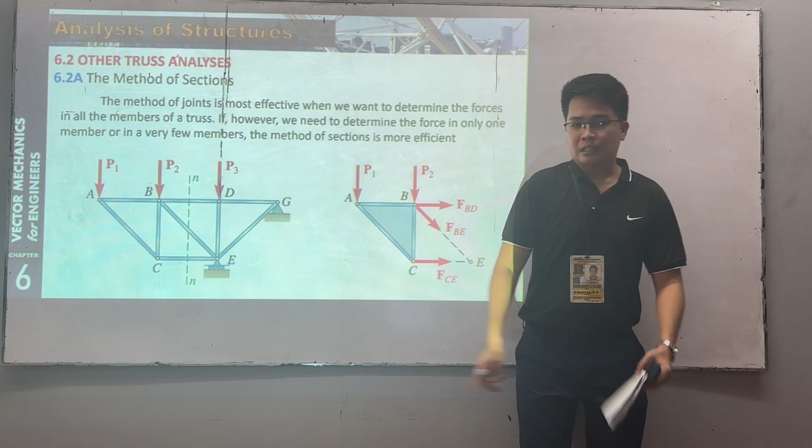Now, for the method of sections, what do we have here? The method of joints is most effective when we want to determine the forces in all the members of a truss. If, however, we need to determine the force in only one member or in a very few members, the method of sections is more efficient.

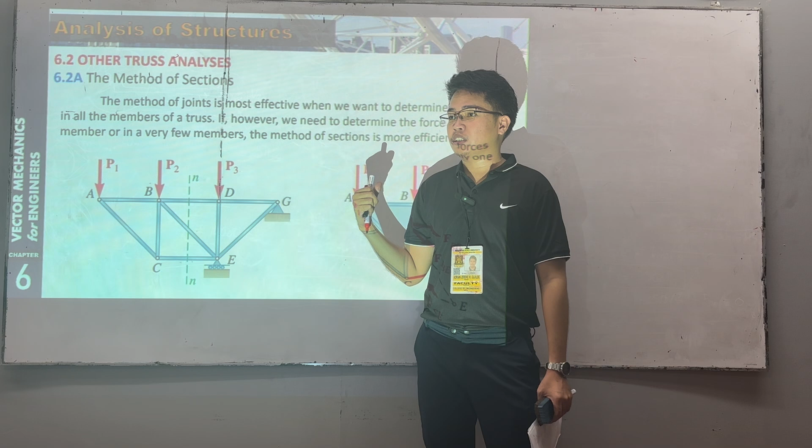So if you want to find all the internal forces, use method of joints. But if you only want a specific member, it's better to use method of sections.

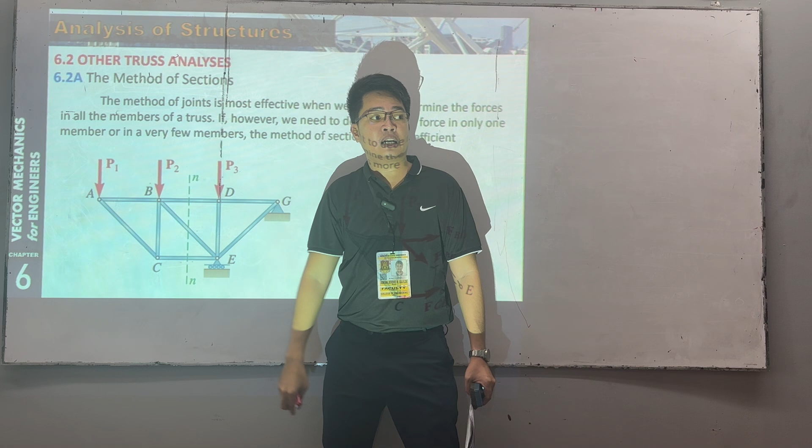In method of sections, if you're looking for a specific member, what you do is cut through it. When you cut, internal forces appear. So instead of having members, what we represent are these forces from the cut. And in using method of sections, our assumption for the force is always tension.

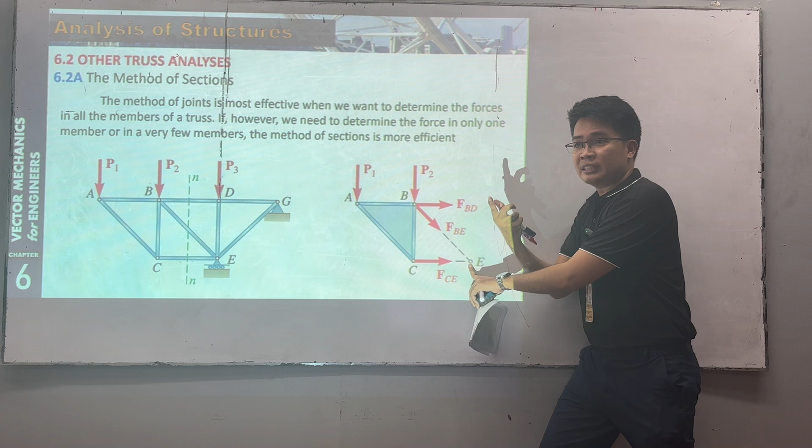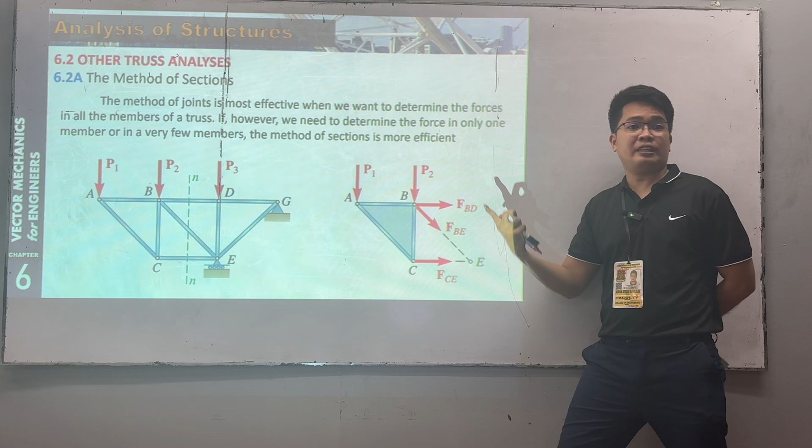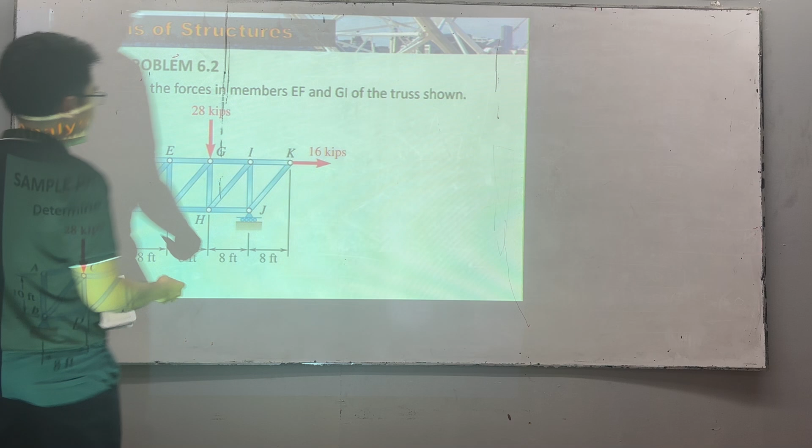So here: we have determined the forces in members EF and GI of the truss shown. So what are we looking for here? We have EF, this member here, and GI. So how do we apply method of sections here?

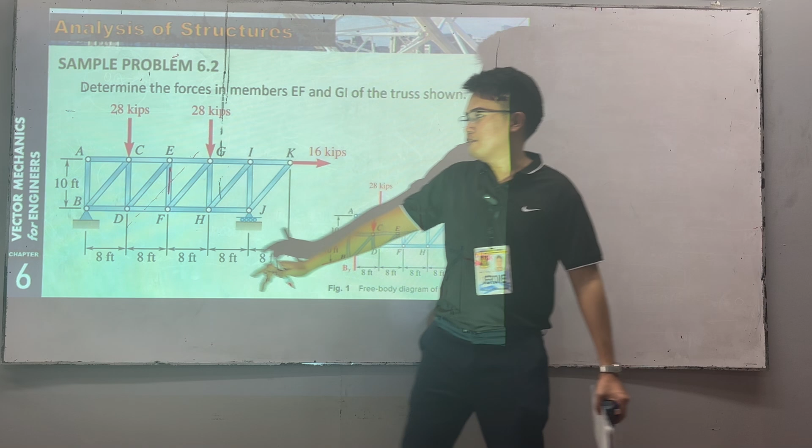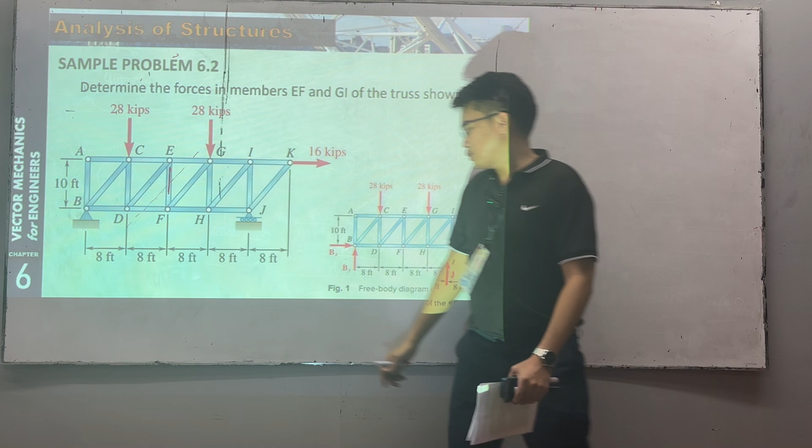So let's find EF. What do we do in method of sections? We cut it, so the image would look something like this. When we cut here, what comes out? It should always be in tension - so this is tension, this is tension, and this is tension. So we have FEG, FEF, and FDF.

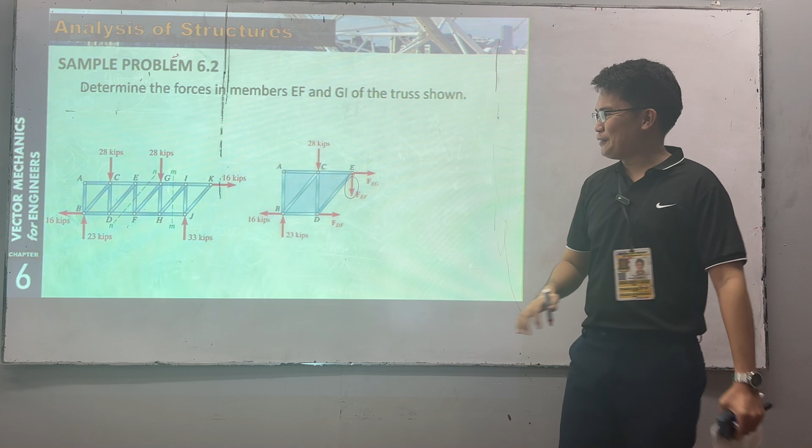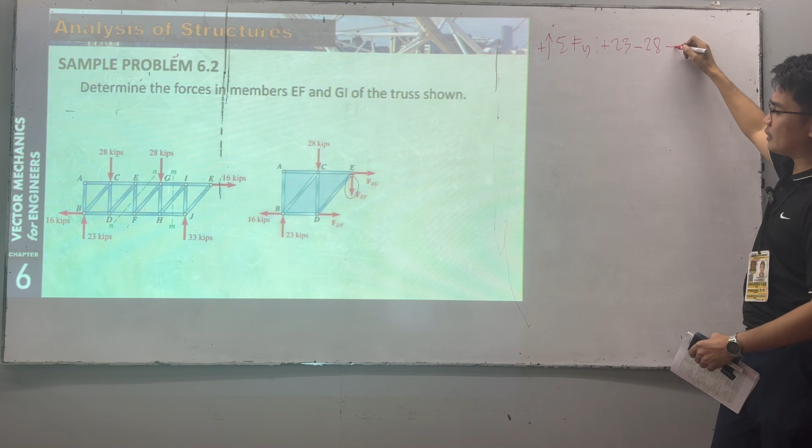Very simple - summation of forces along Y, positive upward. So what do we have there? We have positive 23, negative 28, negative FEF. So automatically, we can get FEF. What's its value?

FEF is negative - positive, negative. Negative, because 23 minus 28. So negative 5. This means our assumption should actually be compression, not tension - or rather, upward, whichever applies. Okay.

So what equation can we use that won't involve FHI and FHJ? Summation of moment at point H. So automatically, no moment, no moment - just FGI. So for FGI, summation of moment at point H, counterclockwise positive.

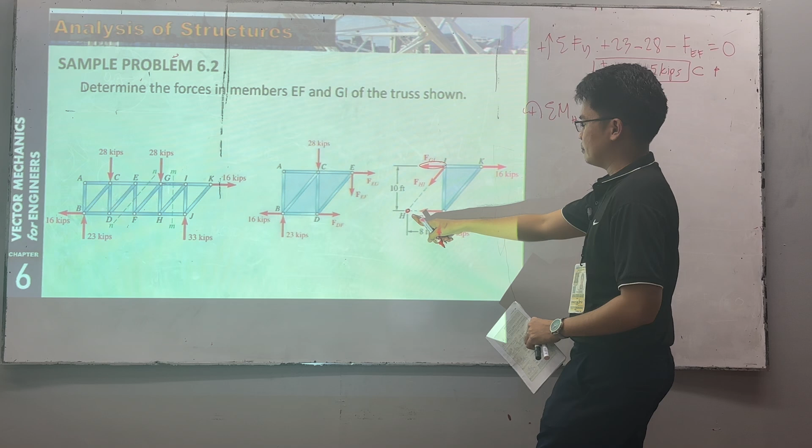So what do we have? FGI, which is positive, with moment arm of 10. What else do we have? This one - we have 33 positive, moment arm of 8. And lastly, this one here is 16 negative, moment arm 10, equals 0. So FGI here equals... what is it? It's negative - negative 10.4 kips.

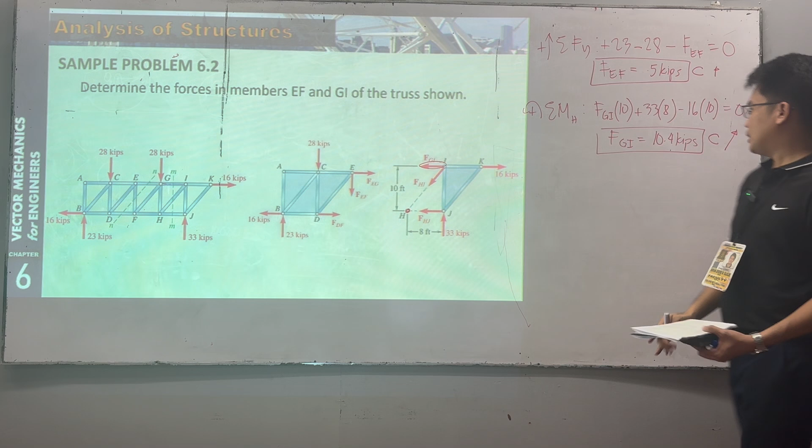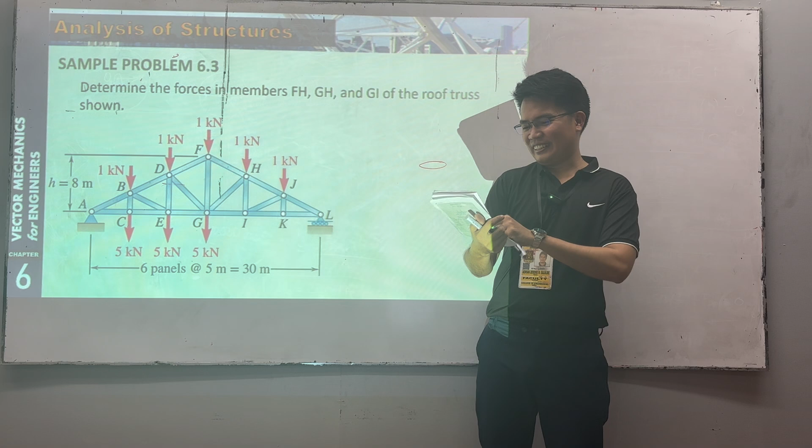Pwede na. Ang chapter 7 na ba? Kaya lisod na chapter do.

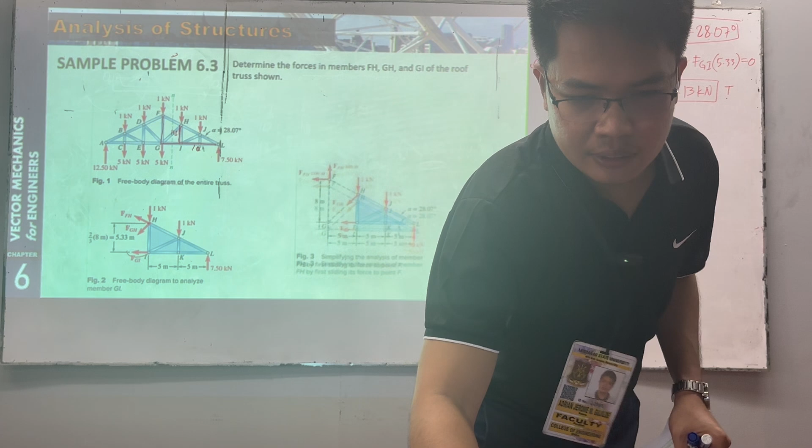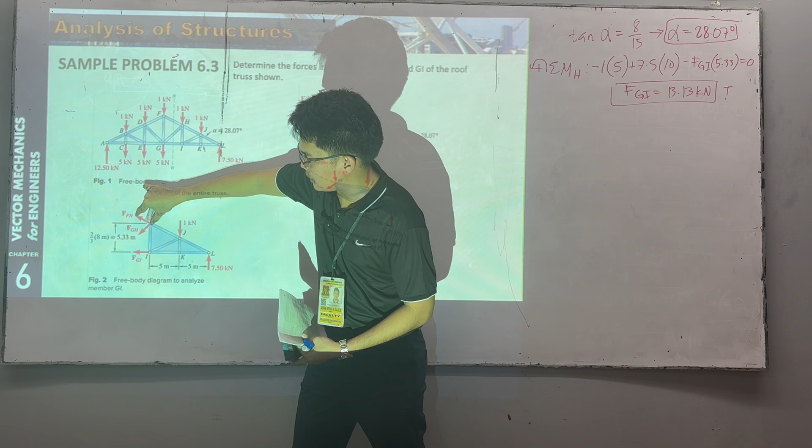Now, kung titingnan nyo dito, yung FFH natin is nandito. Saan tayo pwede mag-moment in order na ma-eliminate si FGI at saka si FGH? Yung gusto nating hanapin is ito. Sige, summation of moment at point what? Point G, kasi ito siya walang moment, ito siya walang moment. So, summation of moments at point G.

Anong nangyari dito? By principle of transmissibility, pwede ko yan usog as long as nasa line of action. Kung nausog ko yan, nandyan na si FH. And then, i-component ko. Kung mag-component ako dyan, ito na yung result: FFH cosine alpha and FFH sine alpha.

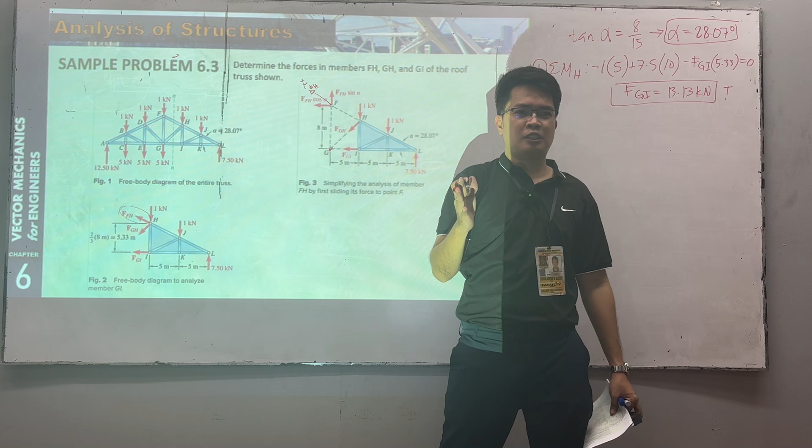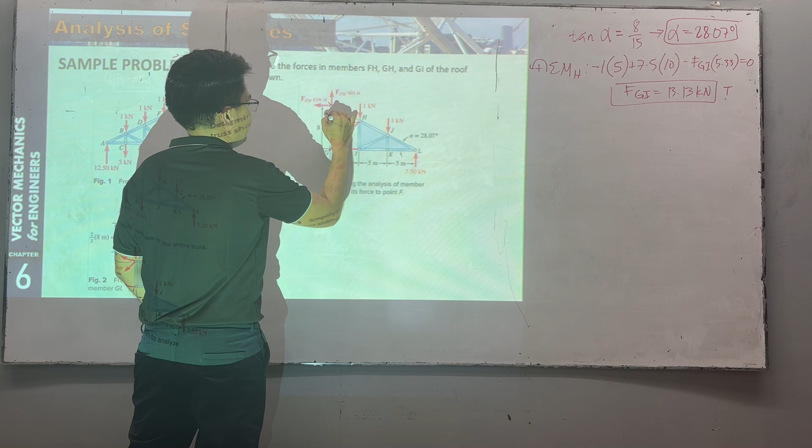Kung ayaw mong gumamit ng principle of transmissibility, pwede naman. Dito ka, so ano yan? We have papunta doon, this is our papunta doon, we have FH cosine alpha. And may papunta doon na FFH sine alpha. We have sine alpha. Pwede din to, pwede dito ka or pwede dito ka. Klaro? So, walang mababago yan.

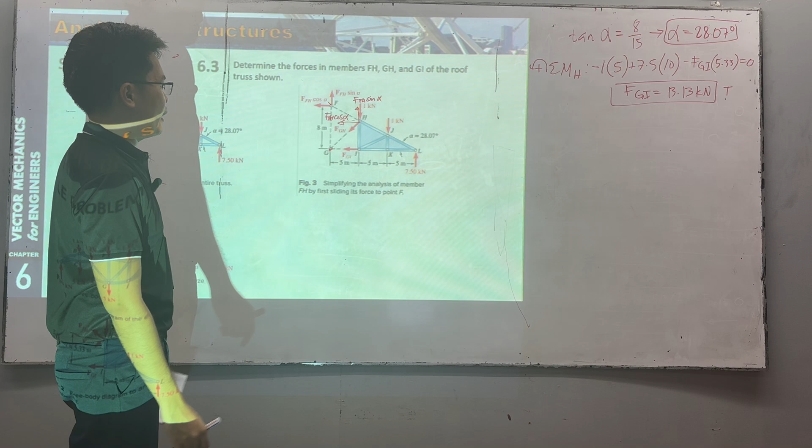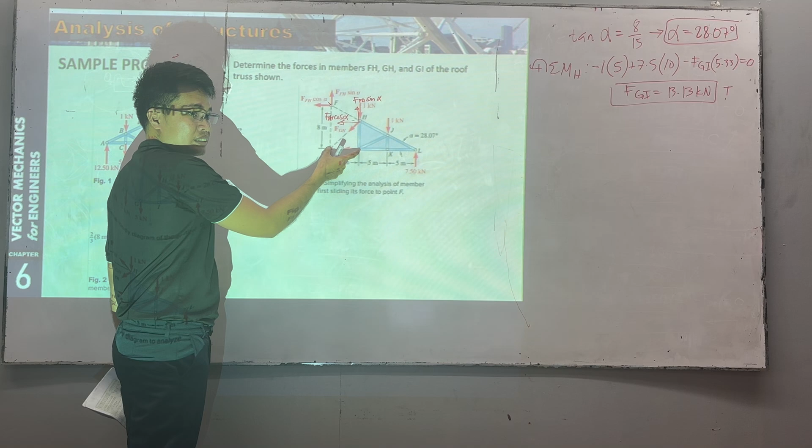The same pa rin yung answer na makukuha. Pero ano yung moment arm nito? Yung moment arm nito is this one here. Ano naman yung moment arm nito? Yung length na to, tama? Okay, so sige, try natin. So, summation of moment at point G, counterclockwise positive.

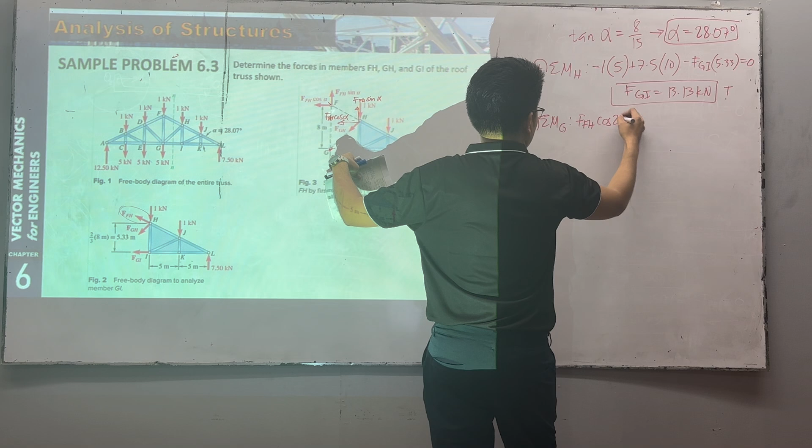Ano yung involved? This one here? FFH cosine. Ano yung alpha ulit? Alpha is 28.07. Okay, and then positive, negative. Positive. How about this one? Positive din, so we have FFH sine of 28.07.

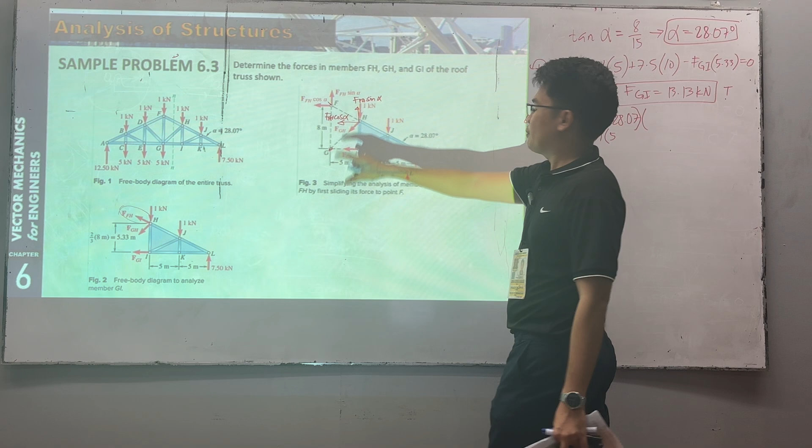And then, ito at saka ito. So, ito we have negative 1 times the moment arm, 5. Ay, wait lang, wala palang moment arm to. Lagyan muna natin ng moment arm. Ano yung moment arm nito? Oh, hindi yan 8, ito yung moment arm natin, di ba? Oh, 5.33, may moment arm pa to.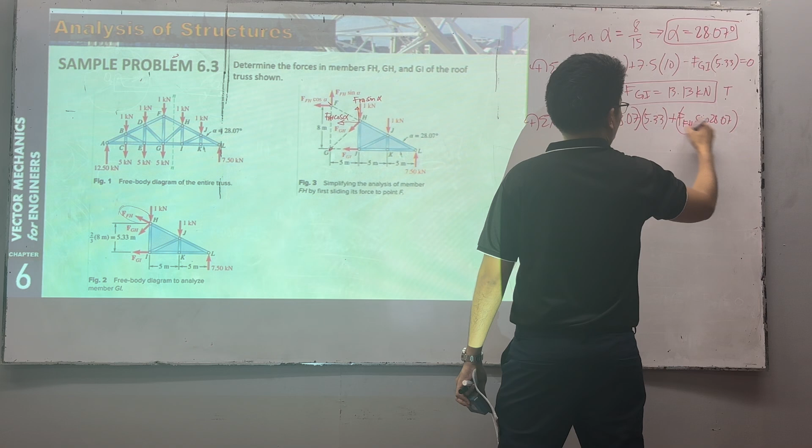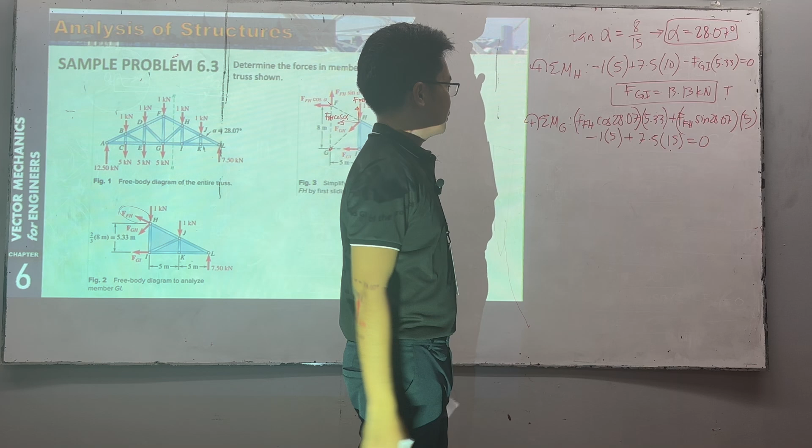5.33. Then, isa plus FFH sine 28.07. Ano yung moment arm? Okay, that is 5. And then minus 1 times 5. And then ito is plus 7.5 times the moment arm. Okay, 10, ay hindi 10. It's 15. We have 15 is equal to 0. And ito siya positive, ito siya is negative.

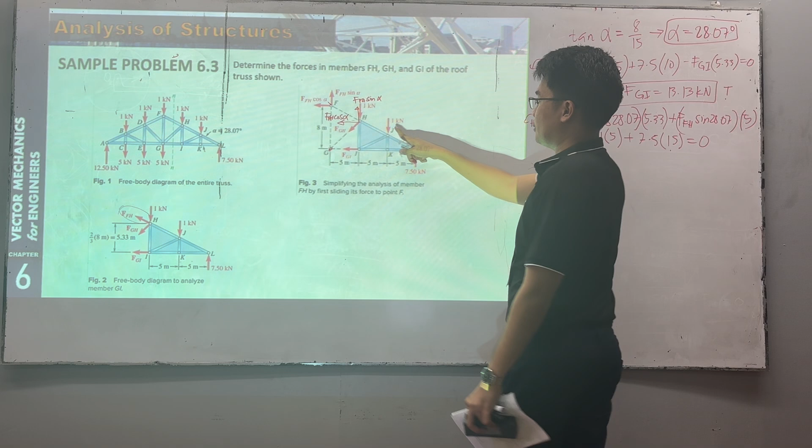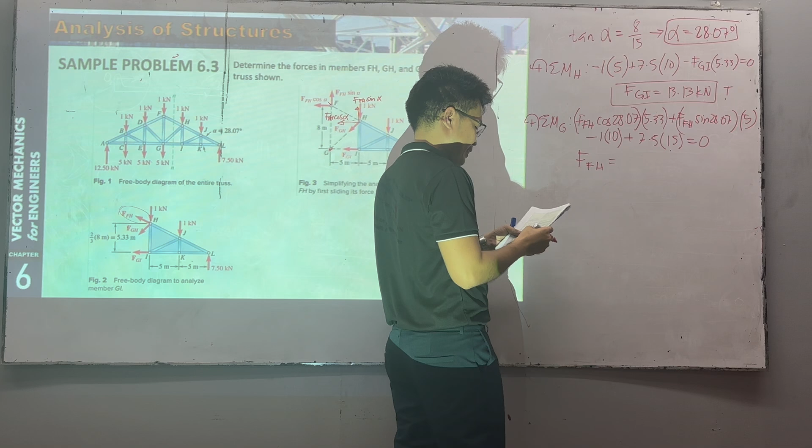Ito? Ay, 10 pala to. Sorry, this one here is 10. Okay, so ayan, wala namang ibang variable dito, kundi FFH lang. So, we have FFH, shift solve, we have that as 13.81 kilonewton compression. So negative yung nakuha nating answer dito. Kung isosolve natin sa calculator. Klaro?

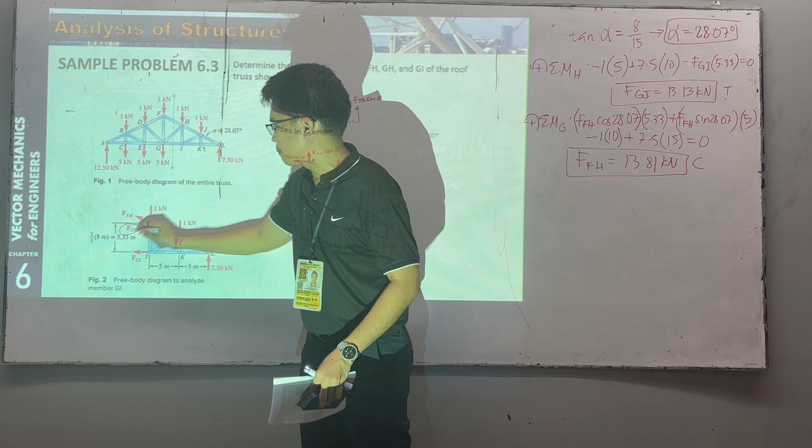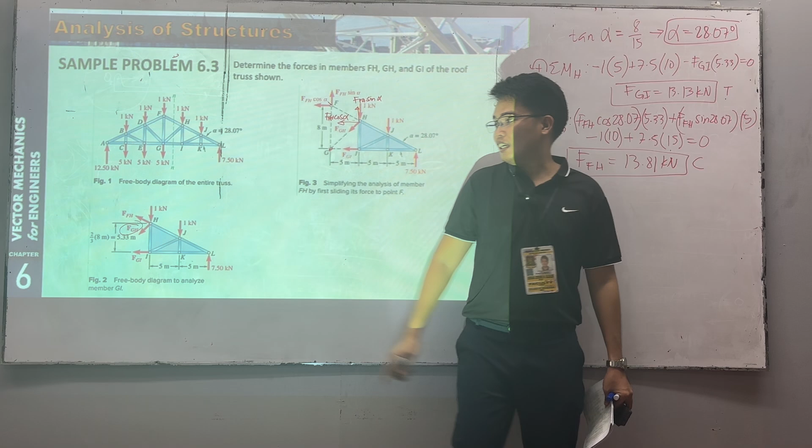Sige daw, ano yung nakuha natin? FGI, check na. FFH, check na. How about ito? Saan tayo magmo-moment? FGH, saan tayo mag-moment? Sige daw. At point, ito yung hinahanap, FGH. Summation of moment at, ano yung pwede natin gamitin?

At L, kasi ito siya, walang moment sa L. Ito din, walang moment sa L. So, ito lang yung may moment sa L natin. Tama? Sige, try natin.

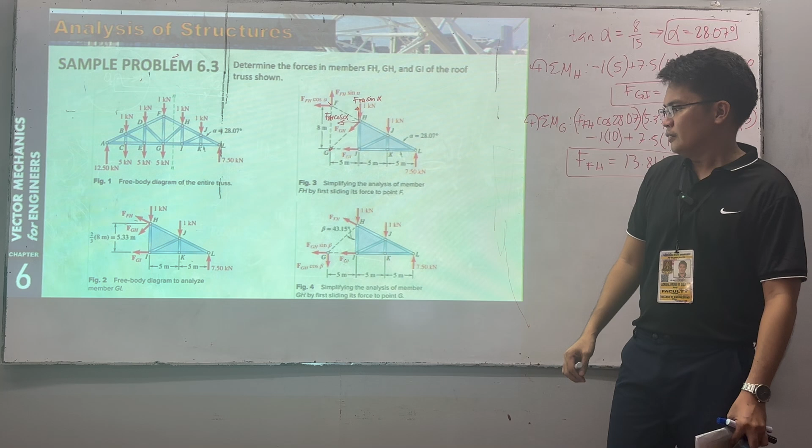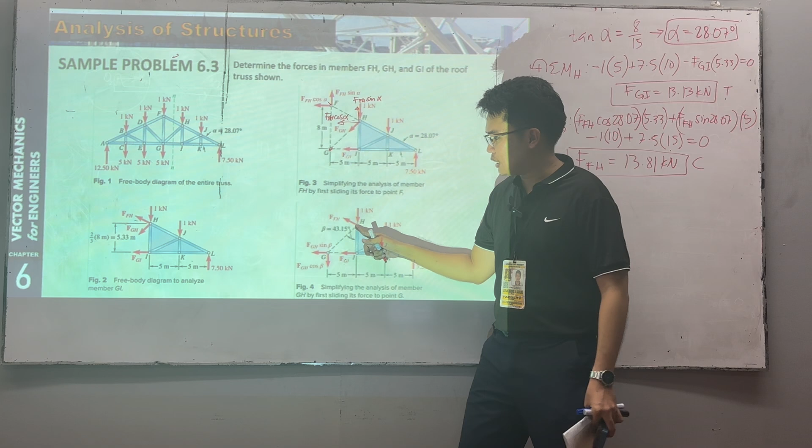So, ayan. So, by principle of transmissibility, ano yung ginawa niya? Nilipat niya papunta dito. Pero pwede namang hindi mo ilipat, pwedeng dito lang tayo maglagay. Okay? So, masosolve pa rin natin yan. Pero try lang natin ilipat. Kung ilipat natin yan, and then i-resolve natin to X and Y component, ito siya, is may moment? Wala, wala. So, ma-eliminate na to. Hindi na natin yan isosolve.

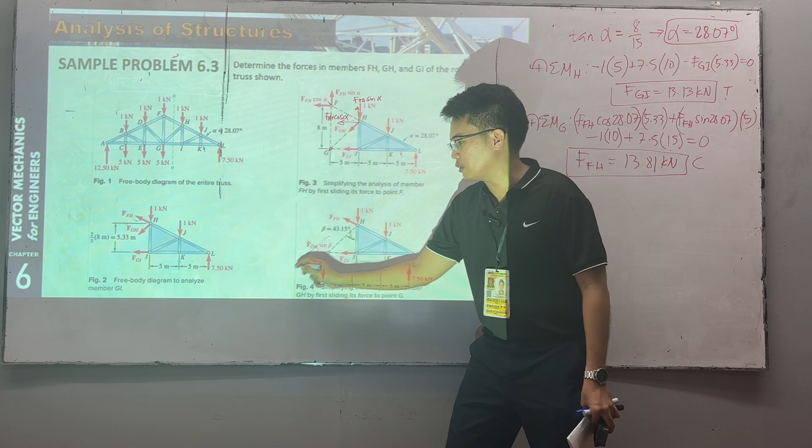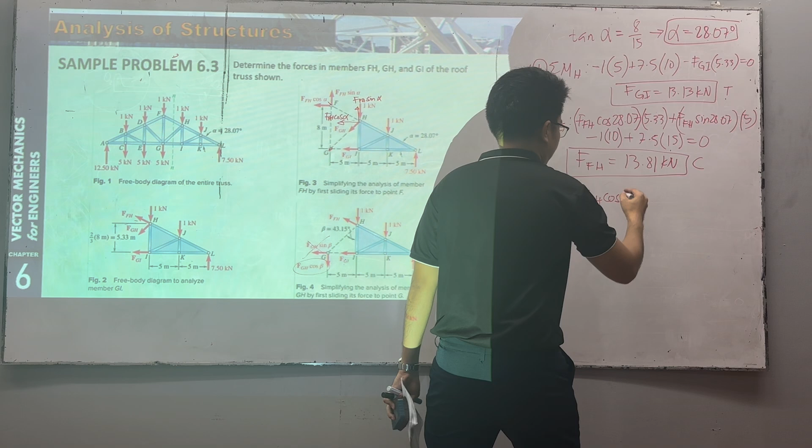So, ito na lang, tama? Dyan tayo mag-summation of moment. So, dito tayo mag-summation of moment at ito yung force natin. Summation of moments at point L, counterclockwise positive. So, ano yung mga forces involved? This one here, FGH cosine of beta, which is 43.15 degrees, times the moment arm, which is 15. Now, sir, paano nakuha yung beta dito, 43.15?

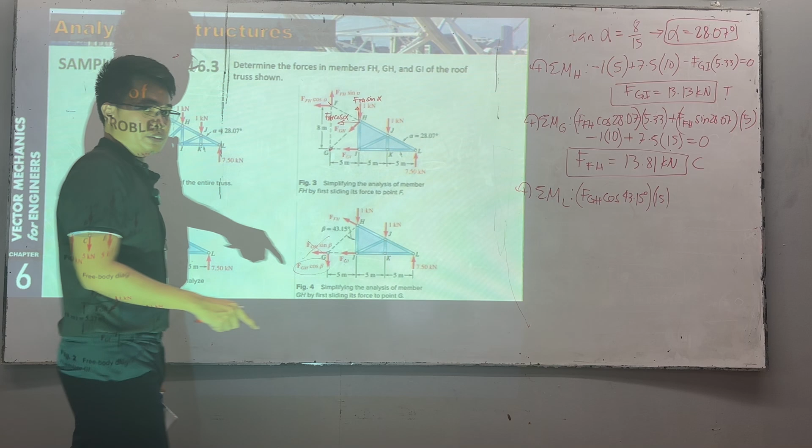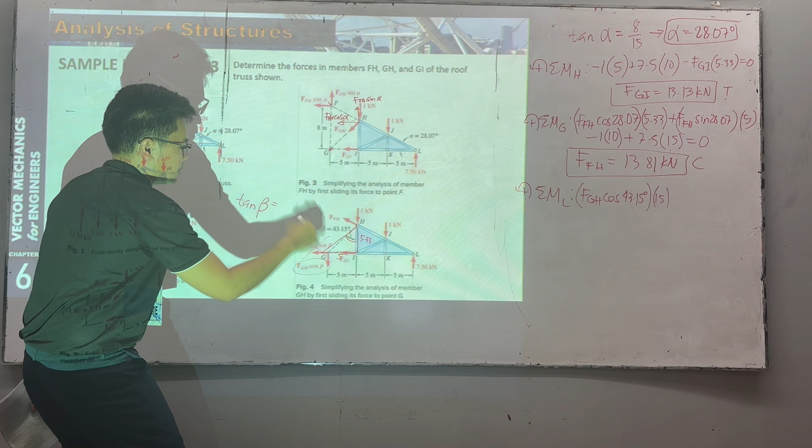Paano daw? Makuha nyo na yan. So, anong meron dito? Ito yung triangle natin. So, ano yung length na to? We have 5.33, this one here is 5. So, paano makuha dito? That is just tangent of beta is opposite over adjacent, 5 over 5.33. So, kung isolve mo to, beta is 43.15. So, very easy lang, analyze nyo lang by common sense.

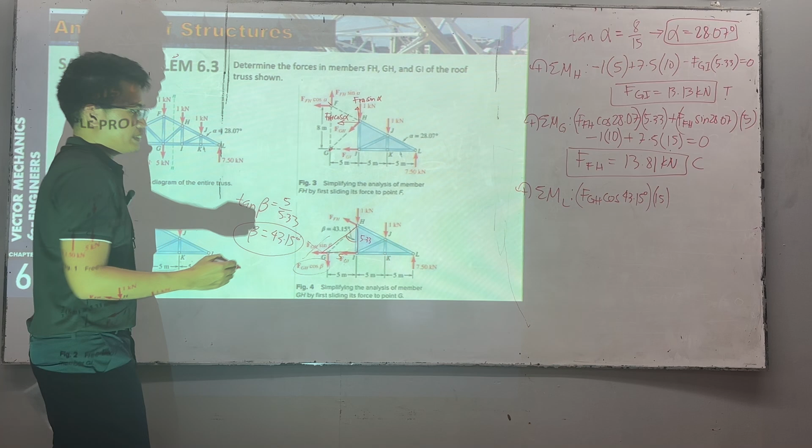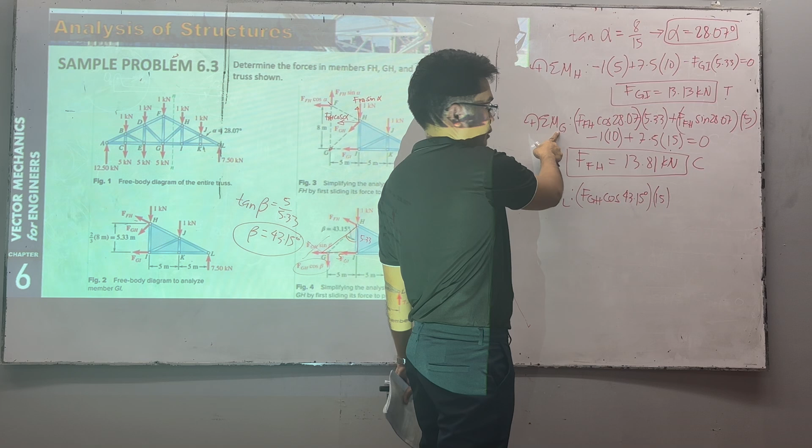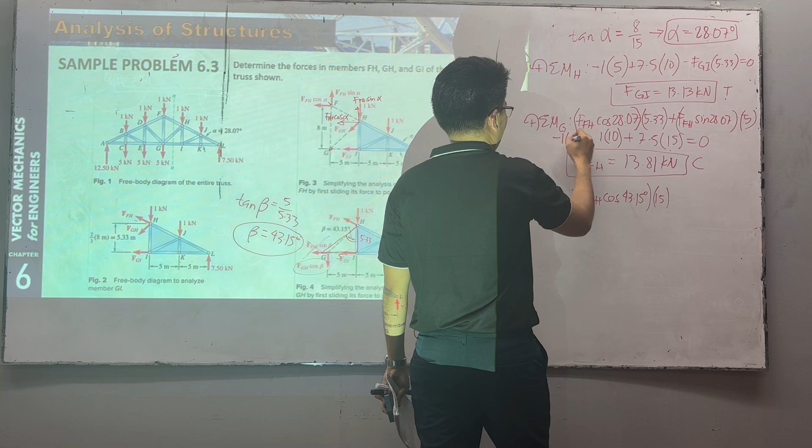Nasaan? Ito? Dalawang 1? Hindi, sa G man ako nag-moment. Ay, ito, may 1 pa pala, sorry. May nakalimutang 1, meron pa pala. Sakto na ito ganiha, ano yon? Minus 1 times 5, minus 1 times 10. Sakto, sakto, perfect na siya. Perfect, o sige.

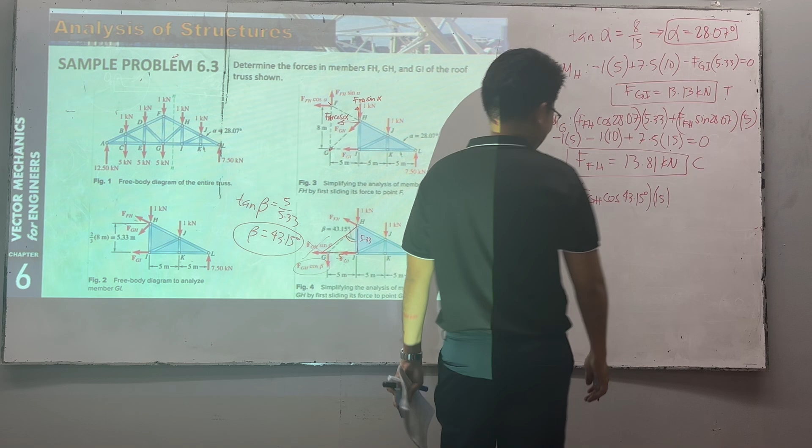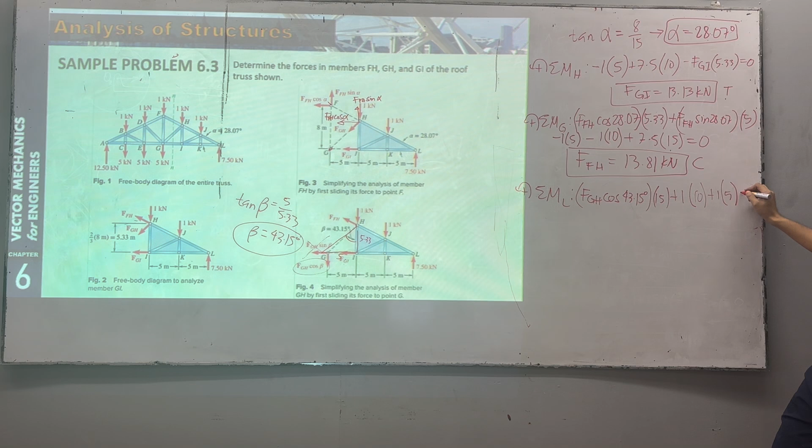Sige, we have, ano yun? Ito lang, may moment. And then, times the moment arm, which is this one. And then, ito din, may moment. So, we have positive 1 times, ano yung moment arm nito? 10. And then, last na, positive 1 times 5 is equal to 0. Yan lang, okay na?

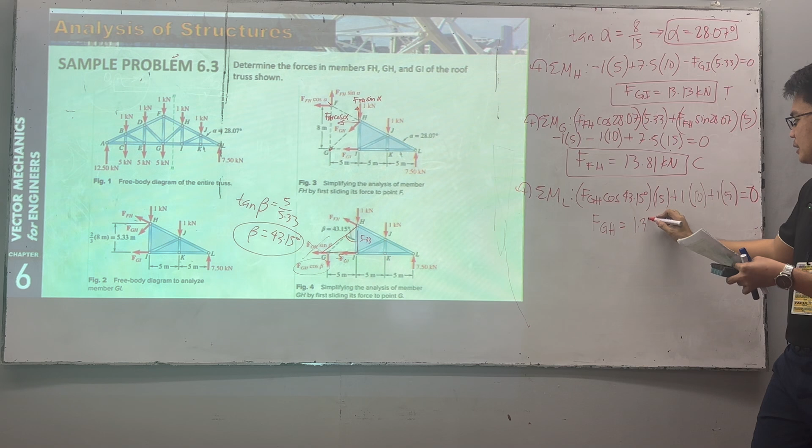Masosolve na to? We have FGH is equal to, negative, we have 1.371 kilonewton. Negative means compression. So, ayan lang.